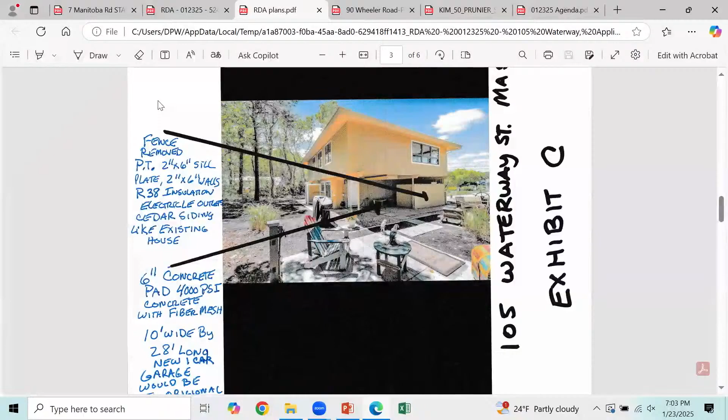Would you like to say something at all? Nope, we're good. Okay, all right, then I'll open it up for questions from commissioners.

So, first question I have is, the plan doesn't show what the flood elevation is on this property. Flood elevation, I think the engineering, Cape and Islands, did they make the Cape and Islands put it on the plan, the flood elevation? No, I'm not seeing any flood elevation on this plan at all.

Because the only resource area is the flood zone. Yeah, I do believe it's elevation 12. Do we know what the grade is out there? I'm grabbing the GIS map as quick as I can, hold on.

Because I was looking at these plans, and there's no flood vents on this. There's 2 flood vents. I sent the plan in, one goes on the back of the wall, and one goes on the side of the wall, and it showed where they've got to go. I just bought them, they were like $300 a piece. There's 2 of them. Right, but this plan doesn't show any flood vents. There's one of those plans I sent in that does show where, yeah, I think he sent it to the building department, put it in the zoning thing, but not in this one.

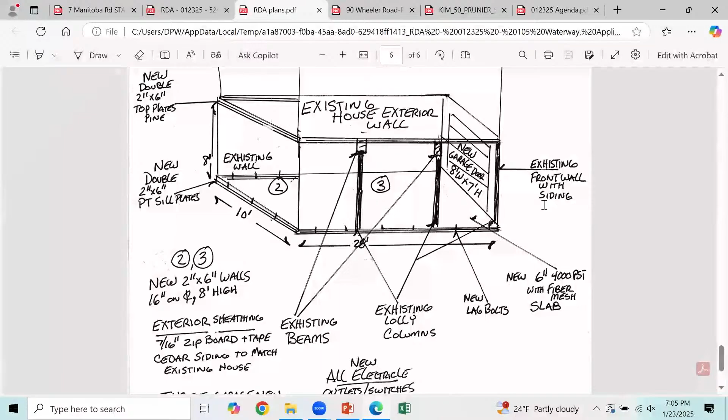The flood vents aren't on this one. We didn't realize you needed them for this one. I did, they're on the plan that I sent. I did talk to the building commissioner, because I wanted to make sure, because I was curious as well. And he said they do have to have them, and that's just that. So he said for whatever permitting purpose, for zoning, they're gonna have to have flood vents put in. Okay, so they are gonna have to do that.

It's AE 11, so A11. Okay, looked it up. Right, what's the grade?

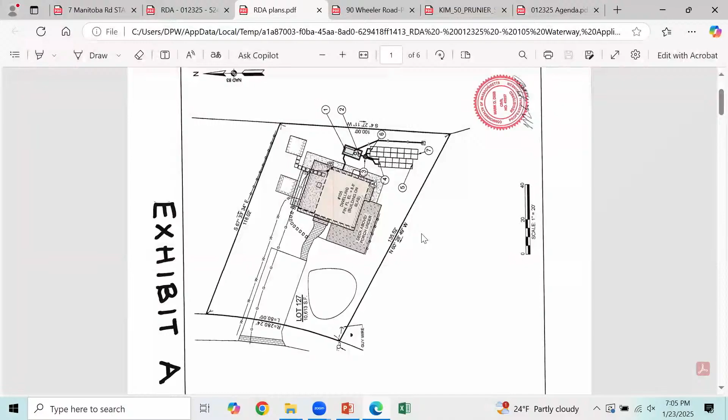Let me grab the contours, hold on. Cape and Islands - at the house, it looks like it's partway between 8 and 10. Okay, so it's only about a foot. The rear of the house, almost going right off the plot plan, is 10, and 8 kind of curves around the front of the house and wobbles through the driveway area. So not that much, okay.

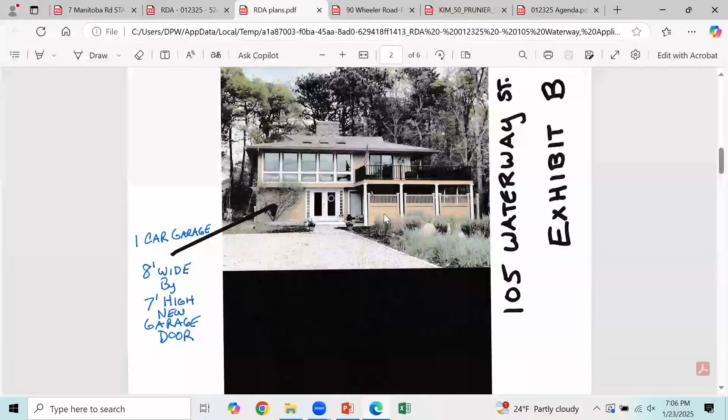They call out for 5/8 sheet rock, and that's not allowed in flood zone. That's a building department thing, they'll pick up on that. As long as it's flood vents, I'm fine. I do know the commissioner said they have to have flood vents, because these are the plans that were submitted with the buildings originally - these were the plans given to us. I went over and talked to the commissioner, and he said they have to have flood vents. When it comes to breakaway walls and stuff like that, that'll be up to them. But it has to go before zoning either way.

It's underneath the house, minimal impact to the resource area, just as long as it has flood vents in it, I'm fine with that. That's all I have. There's no coastal or velocity stuff going on there, just A-zone flooding, and it's across the street.

The bank across the street is actually fairly high, the coastal bank there - a good 2 or 3 feet tall. So it's natural. There are some bulkheads there, but the section across from them is natural.

Anything else? I'm assuming the crushed stone driveway is going to continue to the apron on the garage? Yes. And cobblestones on the side like that, all the way around it.

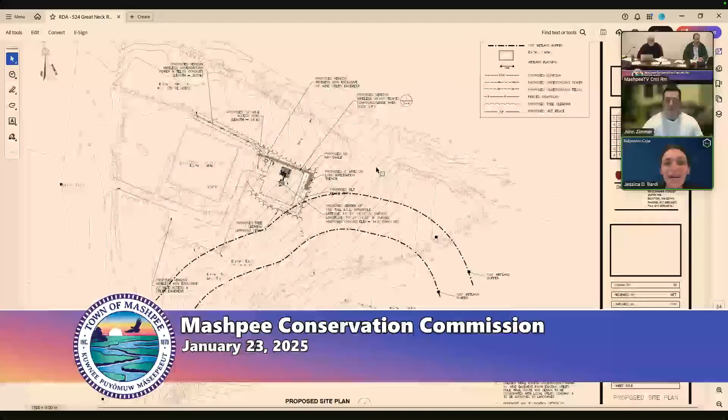Okay, is that it? Yep. Okay, thank you. The woman that's there as well, does she have anything to say? I didn't get her name. Is it Jessica? Oh, thank you, Mr. Chair. Yeah, Jessica Bardi, Robinson and Cole, also here for the applicant, but I defer to John on the wetlands matters. I'm zoning counsel. Okay, all right.

Thank you. All right, so let me open this up to commissioners for questions that you may have. I'm all set, have no questions. Seems pretty straightforward. The only concern that I have is that there's a certified vernal pool, I believe it's about 140 feet out. The certified vernal pool is over 150 feet away. It's within the BVW down in this area.

Okay, and that's all downslope from that corner where you are in the vegetated buffer, right? I'm just looking at your contours. Correct. Yeah, I didn't look at the elevation of those contours. What's the total elevation drop from the corner of the lot that's going to be cleared? That little corner that's being clipped. Yep, from the edge of the proposed work here down to the boundary of the wetland is about a 10-foot elevation change. Oh, it's only 10 feet? Yep. Okay.

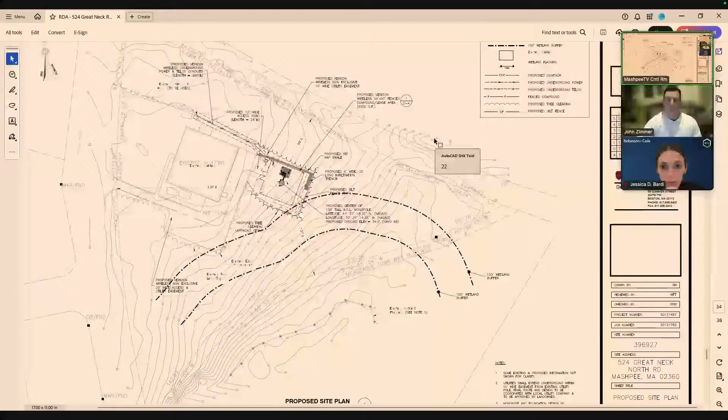Other questions or concerns? There's a lot of stuff in there. I mean, there's a lot of vegetation in there already. I don't think much is gonna get down that slope to the pool. Do we want to beef up the erosion control on that corner just to be on the safe side?

You know, if we just had a straw wattle and got the torrential rains we get, it just overwhelms it. Yeah, but it's all wooded in there, a lot of undergrowth. What time of year did they say they were going to do it? Late summer or fall. So you have a lot of undergrowth there.

They have the silt fence in there, but we could do a straw wattle too because if you look at the details, it drops off just in the work area alone, 2 feet. Did you want to do a straw wattle in addition to the silt fence? Yeah, I'd feel comfortable having some extra erosion control there, just in case.

Yeah, just because of the heavy rainstorms in the summer and the thunderstorms, you know what they're like. So, here we are. No, we're happy to put a straw wattle in as well. Great, anything else?

No? We're good? Dan, would you like to, what's that? Mashpee needs better cell service.

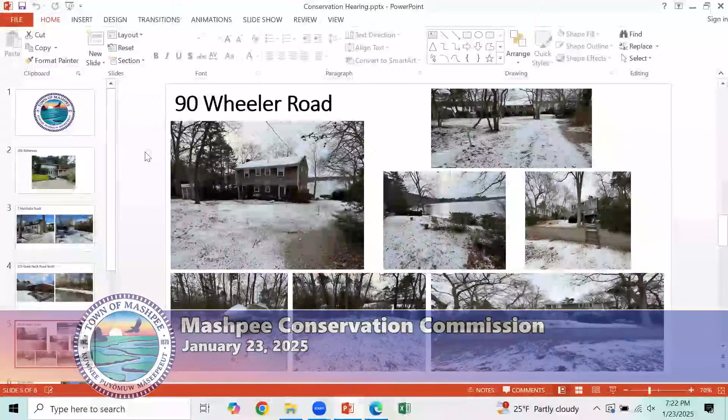This property is located at 90 Wheeler Road, and it's an existing single-family dwelling on a 26,000 square foot lot. I'm not sure if the commission members had a chance to inspect the property, but I'll briefly describe the existing conditions. The house has a crushed stone driveway, small parking area at the top, then a long driveway that leads down to the north side of the existing dwelling, and a small crushed stone parking area in front of the dwelling.

George is the current owner. It's been in his family for 30 years. It was his mother-in-law's house, who he absolutely got along with. So they're looking to make this more suitable for their use to retire in. They live about an hour away now.

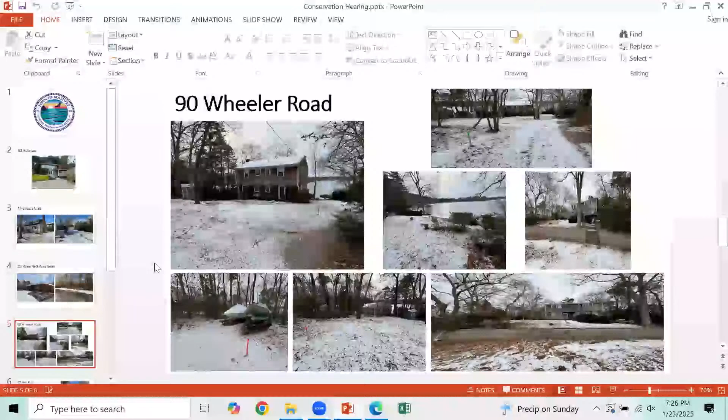At the same time, there's a small shed on the property that is in fairly decent shape. We would like to relocate it to the north of the proposed pool and patio. On the second sheet, I do show a small area of where the pool equipment would be.

As you can see on the plan, a majority of the site work is taking place within previously altered areas, whether it's grass, crushed stone driveway, house, and existing hardscape.

We also are proposing to shorten the existing driveway. Right now there's approximately 1,600 square feet of driveway within the 75-foot buffer zone to the inland bank, and we're removing that driveway outside of it, so there'll be no driveway within the 75 feet.

We are trying to maintain the grades of the driveway. We would prefer to lessen the slope of the driveway, but it would either require too much fill around the house or too much cut near the top of the driveway. So we've done kind of an equal balance. We looked at lowering the grade approximately 2 feet along the driveway and maintaining that slope, which is currently proposed to be a paved driveway. They've had issues in the past with the slope of the driveway being crushed stone, and I believe the maintenance on a paved driveway would be less.

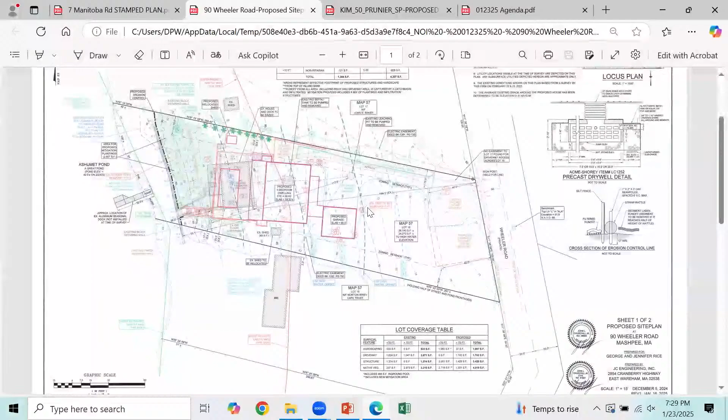We're going to direct it to a set of subsurface infiltration structures, which will be located to the north of the proposed house, in the location of the current crushed stone driveway. So there won't be any vegetation needed to be removed to construct the infiltration structures in that location.

For the house itself, we are providing roof dry wells to all the downspouts that wrap around the proposed footprint. Any of the impervious areas created from the new house and garage will be directed to subsurface infiltration, so we have an equal amount of infiltration and we're not losing any land area that's going to flow off site. The area of the proposed pool is obviously impervious as well.

The pool will be depressed, so it's not really going to create any surface water runoff. But the area around the pool is a patio. We are providing some catch basins or yard drains, one on the southern edge to capture the runoff between the house and the pool, and one at the northwest corner which will capture runoff from the northern side of the proposed patio.

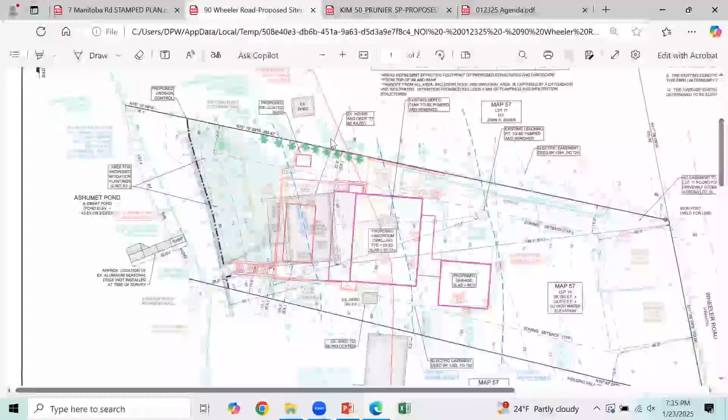We did provide a mitigation table and spelled out a number of different species, both low-lying shrubs, mid-height shrubs, and a variety of trees, which we would hope could be modified if necessary if the species aren't available at the time of planting.

The remaining area of the 2,600 square feet will be planted with a seed mix, just to fill in the ground cover and stabilize that existing slope that currently exists. So even with a modest sized home, we feel there will be a good benefit where adding the drainage, adding the plantings will benefit the surface water quality of the pond.

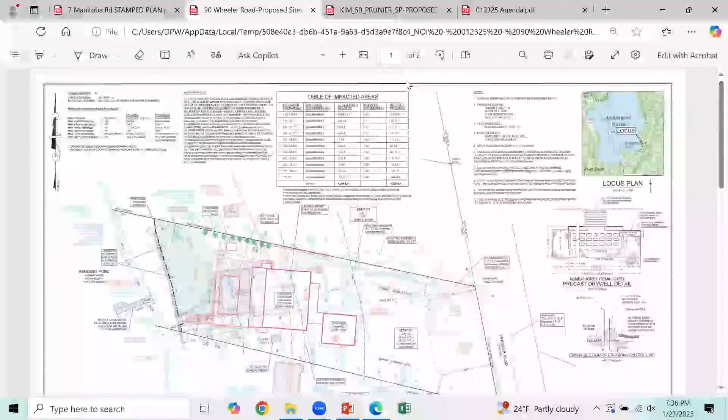If you have any questions, I'd be happy to answer.

We put in the new nitrogen septic. So the septic system right now is currently a septic tank to an existing leaching pit. The leaching pit is roughly in the location of where the proposed septic tanks will be. We're relocating the soil absorption system to maximum distance and constructing it in the crushed stone driveway and some of the vegetation that's up closer to the street, greater than 200 feet from the pond. So we're providing a lot greater separation from both groundwater and the pond, and providing alternative treatment for nitrogen reduction.

If you have any questions, I'd be happy to answer. Great, thank you. So I'll go first to commissioners that have questions or comments.

Okay, a couple of questions I have. Do you have any accommodation for pumping the pool? Where's the pool water going to go? Is it going to be pumped out in a truck, or is it going to pump somewhere else?

I might have put a note on that, but typically any maintenance on pools would be pumped and brought off-site. So there's no discharge of pool water during maintenance periods.

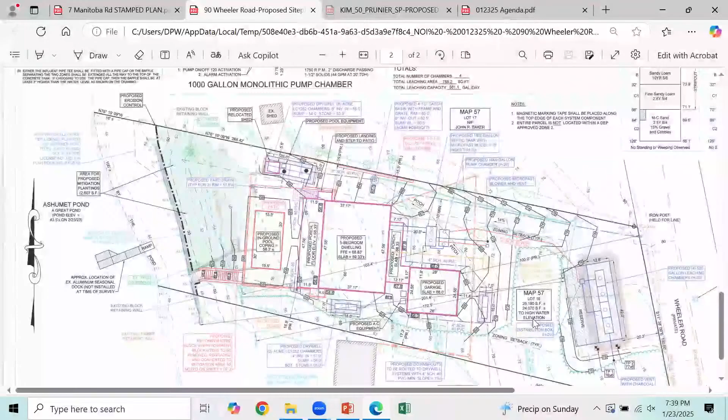So we need to stake out the limit of work to leave that vegetation outside, or we could come up with a landscape plan to put more plants or trees in there. Yeah, we could provide more, maybe an erosion control barrier around the south and north boundary lines that really will define the limit of work that's shown on this plan. Okay, yeah, that sounds good.

One of the questions I have, so I see on your area calcs that the lot coverage is growing by 3 times. You're at 1374 and you're going up to 4,016. And I assume that all those numbers include the pool and the deck and the house and the garage. Does it include the hardscape around the pool?

On the lot coverage table, I have it broken out with hardscape, so it's specifically dealing with the pool and the patio. I don't believe there's any other hardscaping proposed around the site. Then I have it broken up with the pre and post driveway only, then structure, which would be house, porches, and then the native vegetation areas, which doesn't include the areas we don't plan on disturbing, which would be mostly along the southern boundary and a small portion at the northern boundary beside the dry well and the proposed shed.

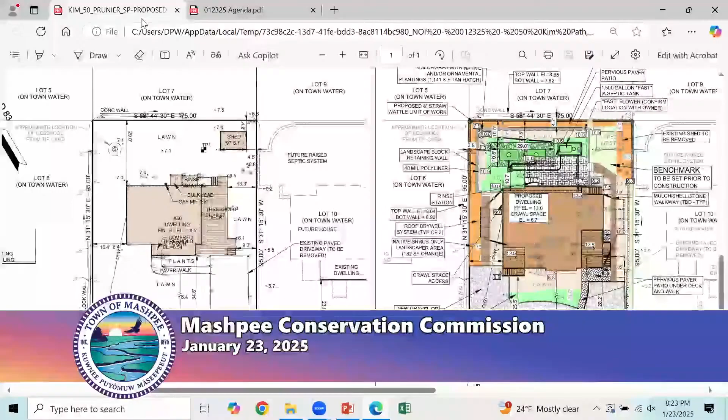Good evening, sir. Good evening, Mark Dibb with Cape and Islands Engineering. So we presented this project at the previous hearing and tried to respond to the commissioners' questions. One thing we added was along the westerly side and northerly side, you'll see a dimension on the westerly side. There's a dimension between the walls. The existing wall on the property to the west and our wall is about 3.9 feet, or 4 feet, as well as the one you're hovering over, that is 4.7 feet from our wall.

What we also did was add the top of wall and bottom of wall elevations for both of those walls. The one on the west, top of wall is 8.04, bottom of wall is 6.9, so that's a wall only about 1.1 feet high at the tallest point, and then the land blends in at each end. The wall to the north is about a foot high.

The reason we added those was to show that if there is some channelization of floodwaters between these walls, it's going to be very minimal, because almost immediately as floodwaters come up, these smaller walls become overtopped. The water will be able to gradually continue to disperse around these properties. As floodwaters come in from the east, it'll flow in and channelize a little bit for a very minimal time until these walls overtop, and then the water will just go where it wants to go.

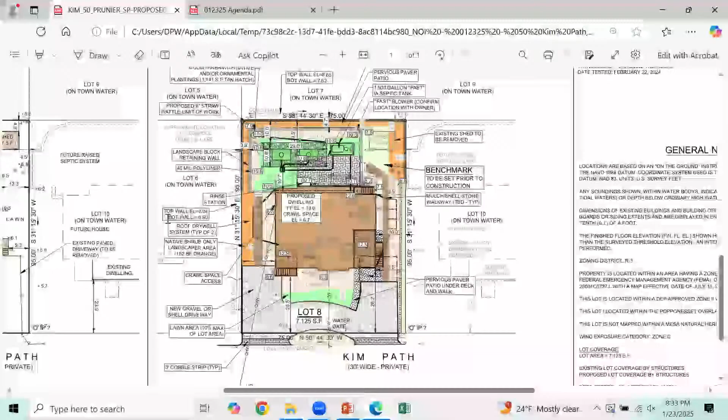Thank you. Questions from commissioners? No, I'm fine. I think you answered all our questions from the last time. Yep. Andy?

Just one clarification I have, Mark, and thanks for the description to the commission. That is the form we are using from the Cape Cod Commission, correct? So, if I'm hearing you right, you're saying these figures are for 2.5 people, but yet it's a...

3-bedroom home, so on any given day there could be 6 people. So even though we have figures, and that's the way the form works, would you agree it's very easy to exceed these numbers? In fact, quite frequently you would exceed it, especially in the summer months, if you have 6 people using the system.

If you notice, at the end of all these calculations is an average. Yeah, I see that. It takes the design flow, which does consider 6 people, and then it averages that design flow with the actual flow.